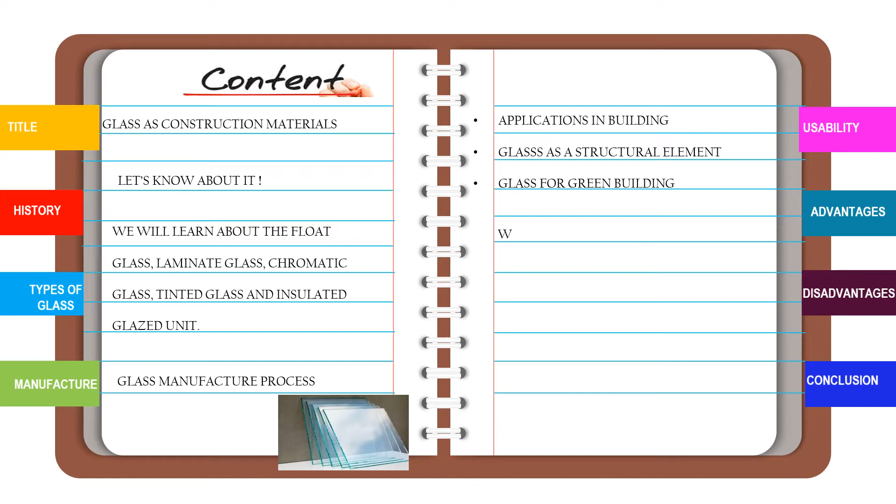Assalamualaikum and hi everyone. Today I will present about the history of glass.

First, let me introduce to you guys about the glass. Glass is a material that is produced from liquid sands. This means that depending on whether the glass transition temperature is the melting or solidifying point, materials change from a hard and brittle state into a liquid state or vice versa. Glass is used in engineering for building and architectural purposes.

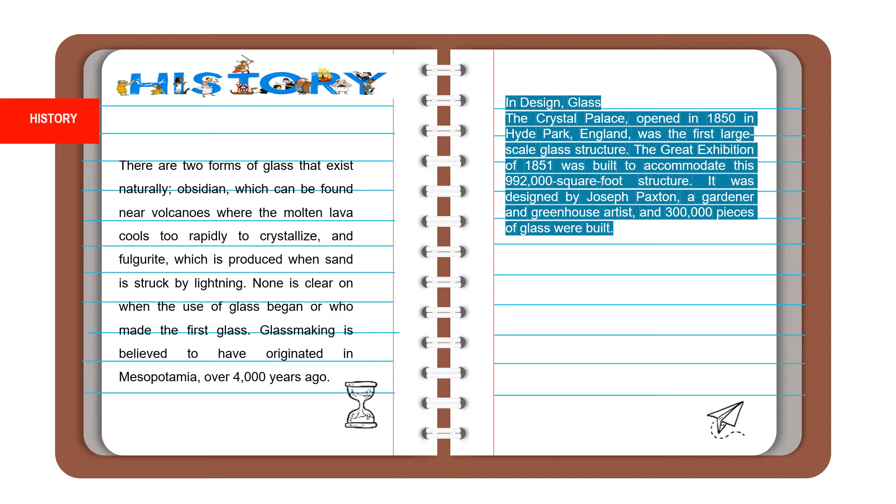In design glass, the Crystal Palace opened in 1850 in Hyde Park, England, was the first large-scale glass structure. The Great Exhibition of 1851 was built to accommodate this 992,000 square foot structure. It was designed by Joseph Paxton, a gardener and greenhouse artist, and 300,000 pieces of glass were built.

Modular parts were introduced into the architecture, a process that was revolutionary at the time, leading to the building being complete in record time. Walls and ceilings were made from iron frames setting the stage for the largest glass panes included. After the Great Exhibition, the Crystal Palace was moved to Sydenham Hill, where it stood until a fire demolished it in 1936. Let's go to the next slide.

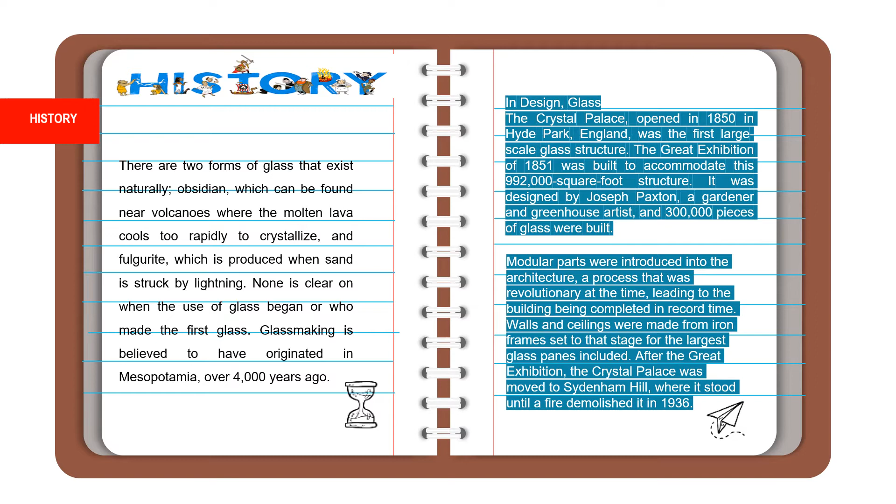Types of glass. Firstly, float glass. Float glass is made from sodium silicate and calcium silicate, and it's called soda-lime glass. This float glass is clear and flat. The thickness is from 2 mm to 20 mm and the weight range is from 6 to 36 kg per square meter.

Laminated glass. Laminated glass is produced by combining 2 or more sheets of float glass with 1 or more interlayers. The interlayers work to support and hold the glass to create a strong uniform layer even when broken. Toughened glass. Toughened glass has undergone a process of controlled treatment to increase the strength, and this glass is 4 times stronger than normal glass.

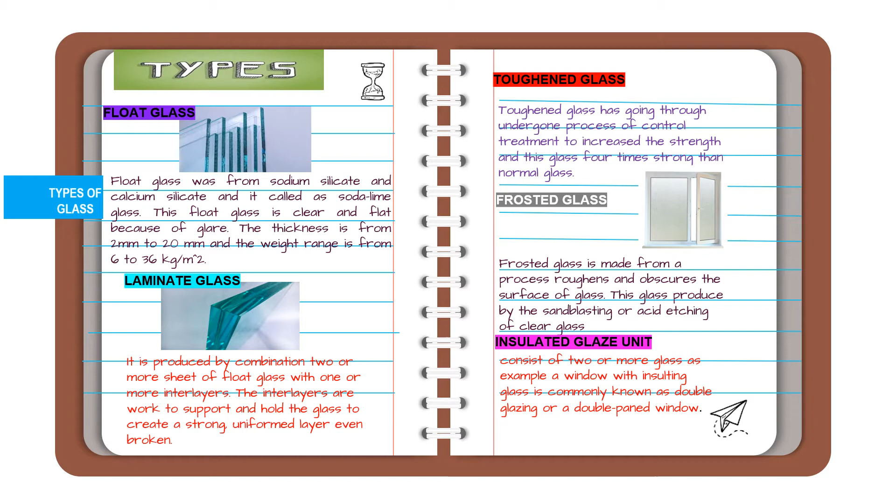Frosted glass. Frosted glass is made from a process that roughens and obscures the surface of glass. This glass is produced by sandblasting or acid etching of clear glass. An insulated glass unit consists of 2 or more glass panes. As an example, a window with insulating glass is commonly known as double glazing or a double pane window.

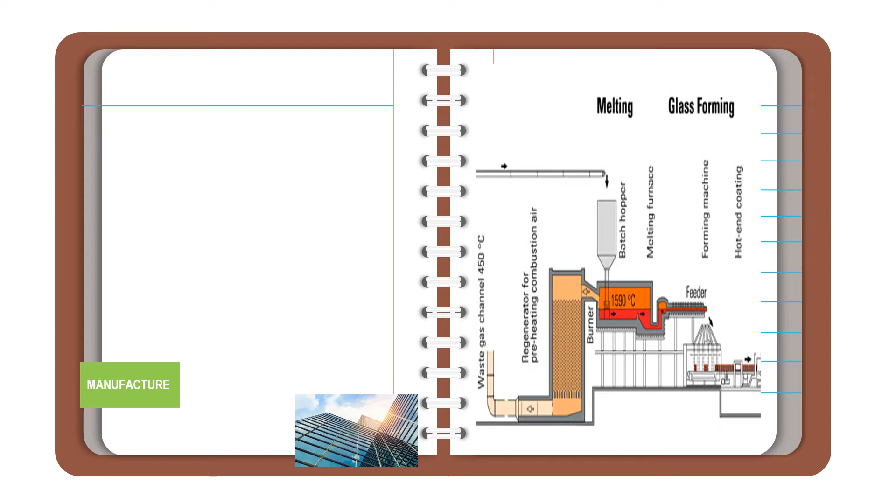Hi, my name is Ernie, and I will continue the presentation about the glass manufacturing process. So here we have 6 processes. The first process is melting and refining. Clear glass has to be collected from the right raw materials. The components are combined and the load is heated to 1500 degrees Celsius and the entire load is moved into a furnace. Certain metal oxides are often added into the mixture to add color. The raw materials used in the glass melting oven would be heated from 1500 to 1700 degrees Celsius in a sequence of configurations.

So the next process is the float bath, which consists of a mirror-like surface made of molten tin. The molten material from the furnace flows in. At 1500 degrees Celsius, this substance enters the bath and exits the bath at about 650 degrees Celsius.

And the next process is coating for reflective glass. As a reflective surface of glass is made, which helps to maintain the interior, coating techniques are used to add a hard coat or a soft coat to the cool ribbon surface at high temperature. In general, glass containers are sprayed on 2 surfaces, one at the hot end before annealing and the other at the cool end only after annealing. And the next step is annealing.

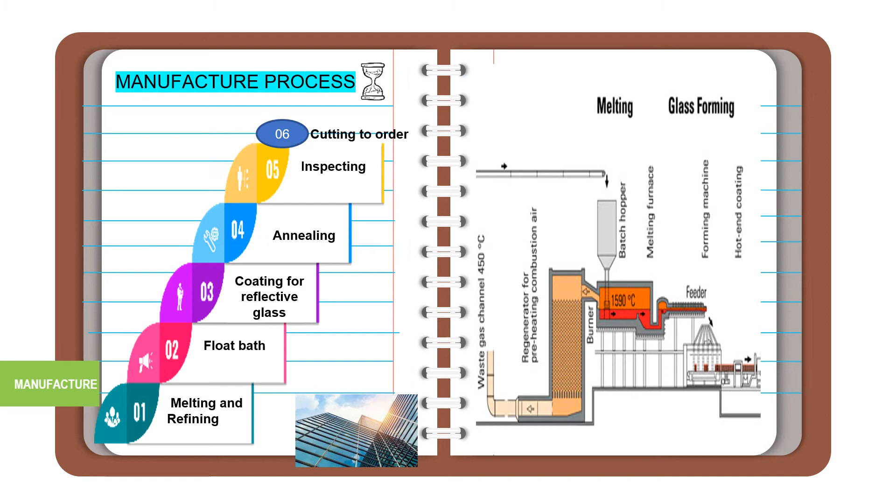So now, let's proceed to the usability of glass. Glass has many influences in our daily lives. It is one of the most adaptable and the earliest materials in the building industry, and its role has evolved over the years. It has been made into practical and decorative materials and objects since the ancient days.

First and foremost, the application of glass can be seen in landscaping material. The glass used is sustainable and eco-friendly since it is fully recycled. Glass mulches are a unique and low-maintenance alternative to traditional bark or gravel mulches. It also lasts a lifetime since it cannot burn, melt, or discolor.

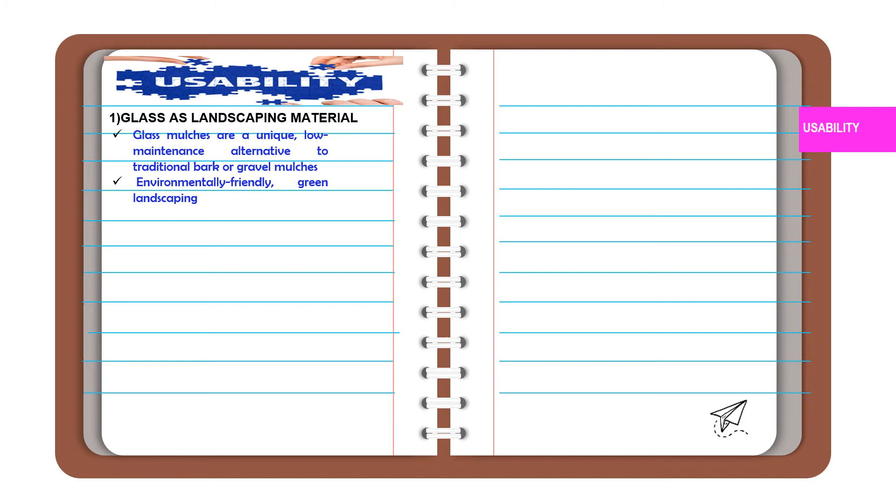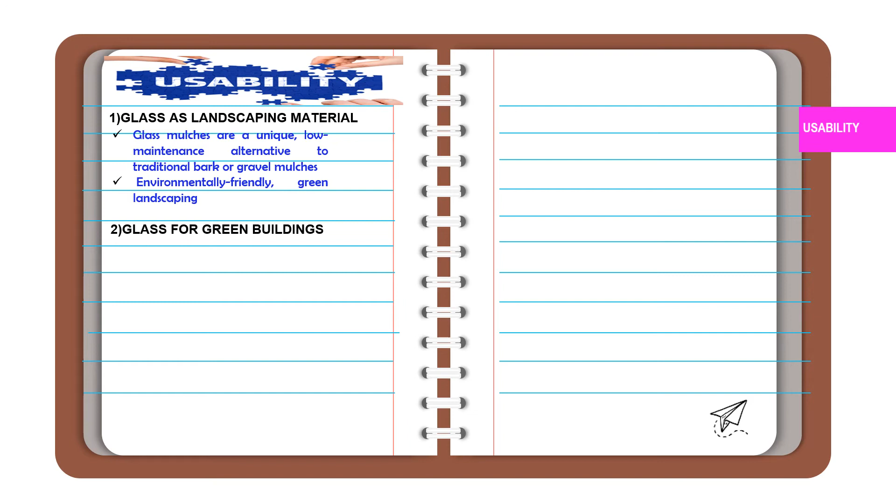Next is glass for green buildings. Reflective glass has a reflective coating that filters heat and lets optimum light into the building. It reduces the heat gain inside the building, thus reducing the electricity and the cooling cost.

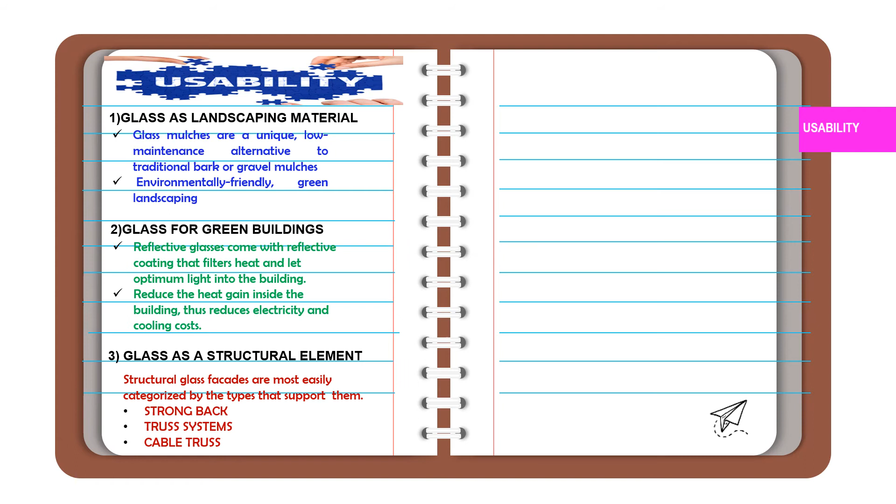Next, glass can also be used as a structural element. Examples of the elements are shower enclosures, frameless windows, although not all frameless windows are structural, and glass facades and canopies. Structural glass facades can be easily categorized by the types that support them, which are strongback, truss system, cable truss, gridshells, cable net, and glass fins.

Little do you know that we also use glass in pavement? Glassphalt is a variety of asphalt that uses crushed glass. It has been used as an option to conventional bituminous asphalt pavement. Glassphalt must be properly mixed and placed if it is to achieve roadway pavement standards. There is about 10 to 20% of glass by weight in glassphalt.

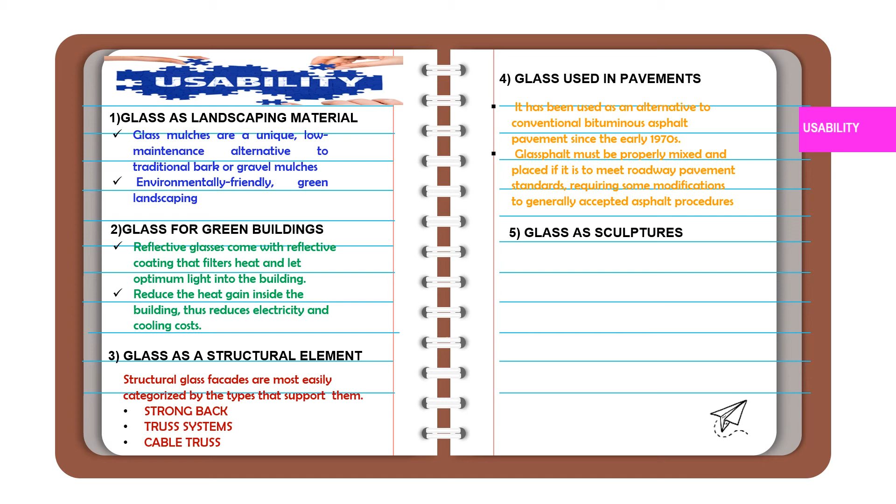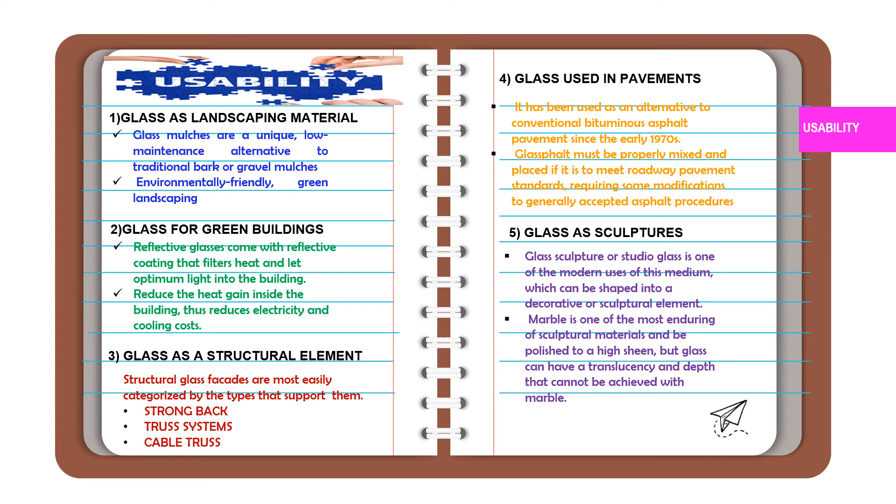So last but not least, glass as sculptures. Glass has varied textures, finishes, and colors. Glass sculpture, also called studio glass, is another modern use of this medium, which can be shaped into a sculpture or decorative element. Marble is one of the most enduring of sculptural materials and can be polished to a high sheen, but glass can have a translucency and depth that cannot be achieved with marble.

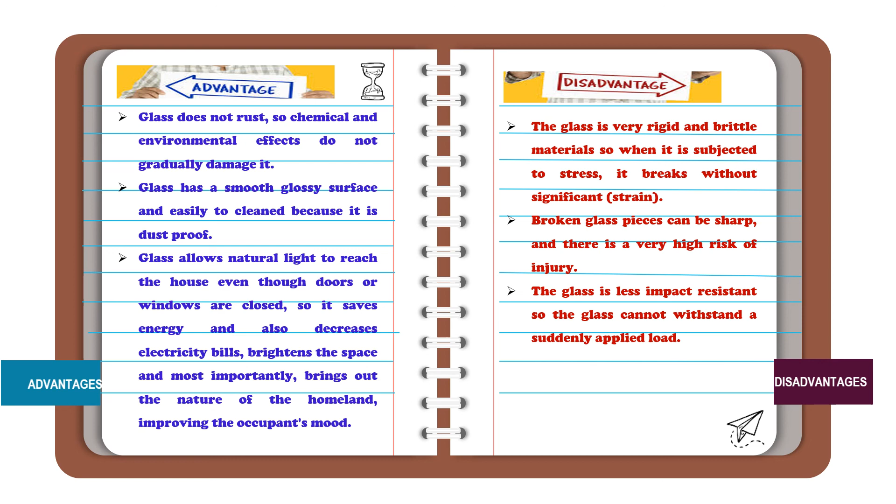Next, for the conclusion, glass has gained a specific reputation as an important construction material over a span of time. In addition to being a construction material, it is often used in a building in multiple ways to increase the overall consistency, for example in furniture, electrical equipment, and decorative objects. Different technical advances have made it a favorite option for architects and planners to support sustainability.